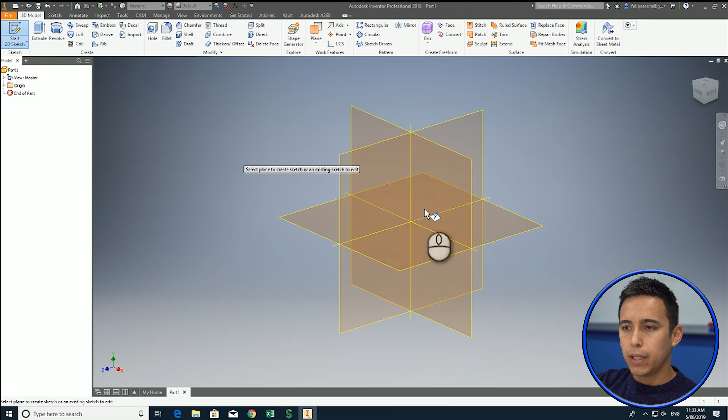So basically what I'm going to do right now is create a new part using the templates, the part templates that are already included in Autodesk Inventor out of the box. And the first thing that I'm going to do is to create a new sketch in one of the planes.

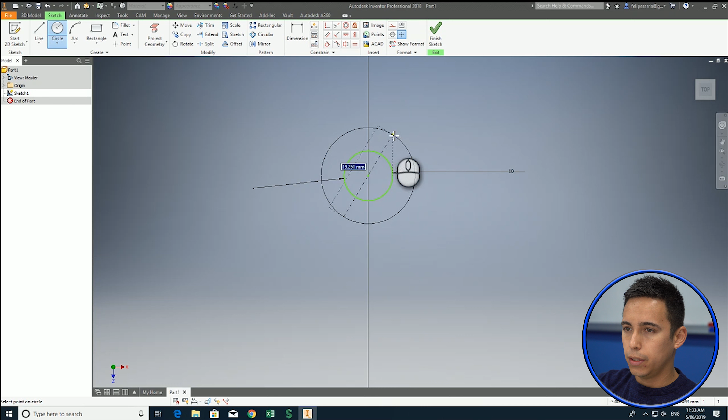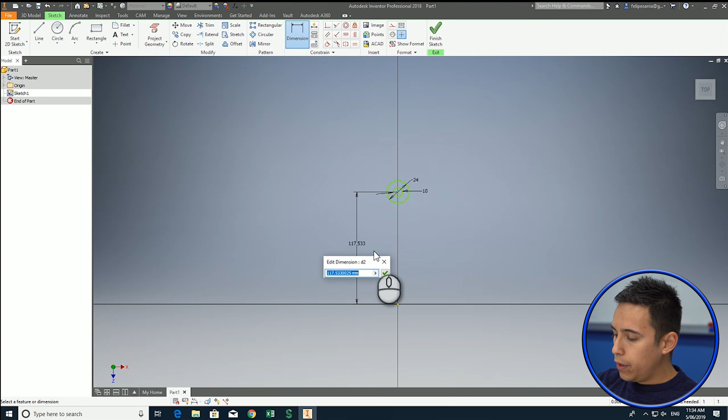And now I want to create some circles using some dimensions. In this case, this is going to be a 10 millimeter circle, and then I'm going to create another circle that is going to be a 24 millimeter diameter circle. Now this is my first geometry, which I'm going to constrain using this dimension command or this dimension tool, and I'm going to constrain these circles 35 millimeters from the center point of my work plane.

Now I'm going to create another two concentric circles. One is going to be a 12 millimeter circle, and the other one is going to be a 32. There you go, 32. What I'm sketching is called a girder plate that is going to be used later on an assembly. So I'm going to constrain these concentric circles as well using the center point of this plane.

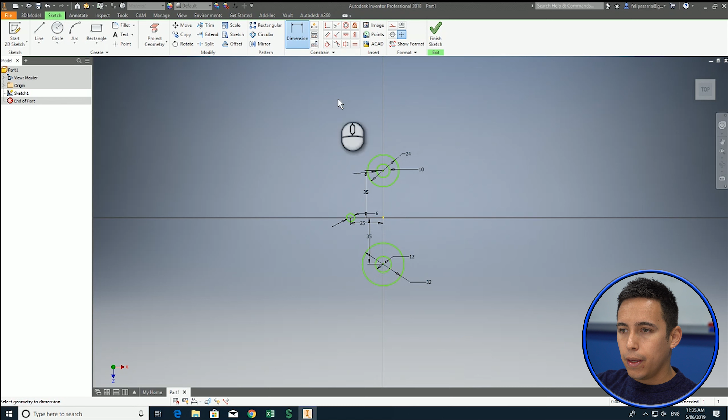And now I'm going to create two circles that are going to be used to insert some pins, and these circles are 6 millimeter diameter. And I'm going to constrain them 25 millimeters away from the center point of this plane. And I can create another one at the other side, 25. Oh, sorry, this is 6, perfect. And I'm going to constrain them using this constraining tool, 25 millimeters away from the center point.

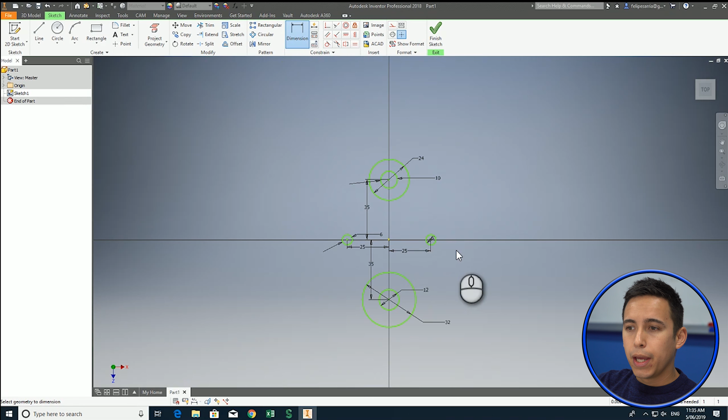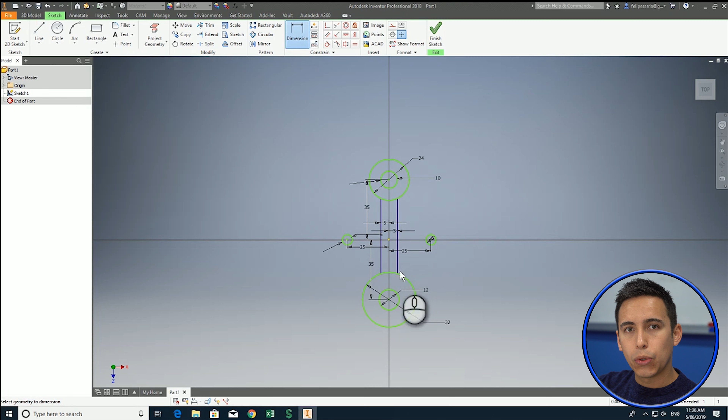Now that I have all these constrained, I'm going to add some lines here. This is going to be like a rib between these two circles. You're going to see how it works when I extrude it. And I'm going to constrain these two lines 5 millimeters away from the center, like this. All right. It's all about constraining and using all the tools that you have available to build or to draw your sketch in a proper way.

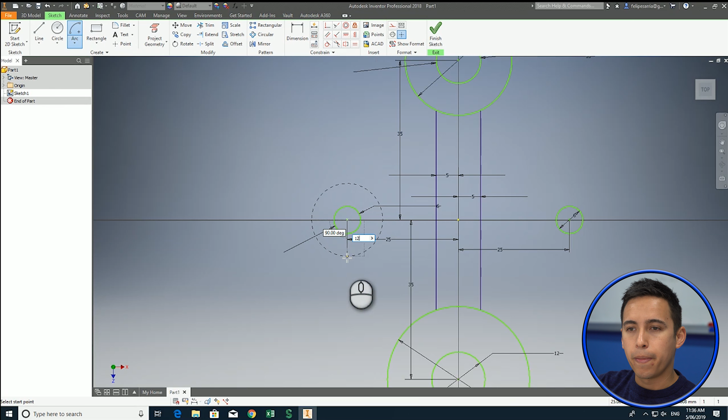And now I need to draw some arcs. So I'm going to use the center point of these two circles as my initial point, and I know that the radius of these arcs is 12 millimeters. So there you go. I have one arc here, and I will draw the other arc in the other circle. Nice.

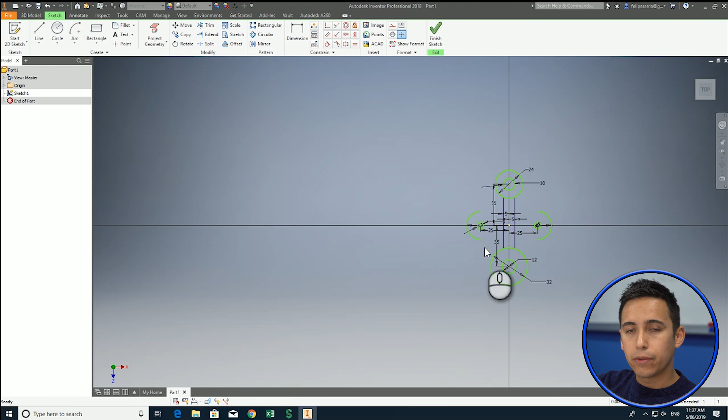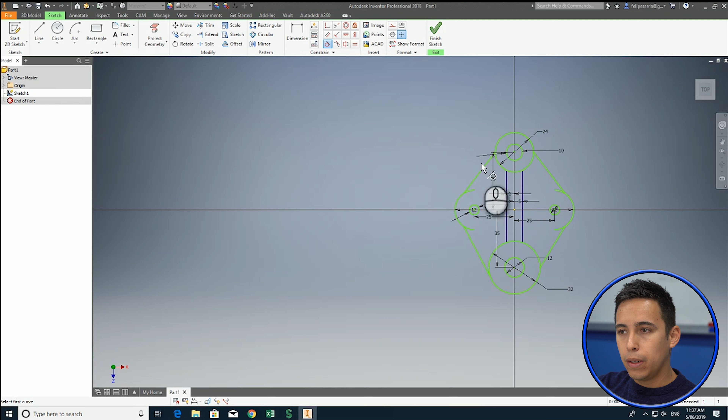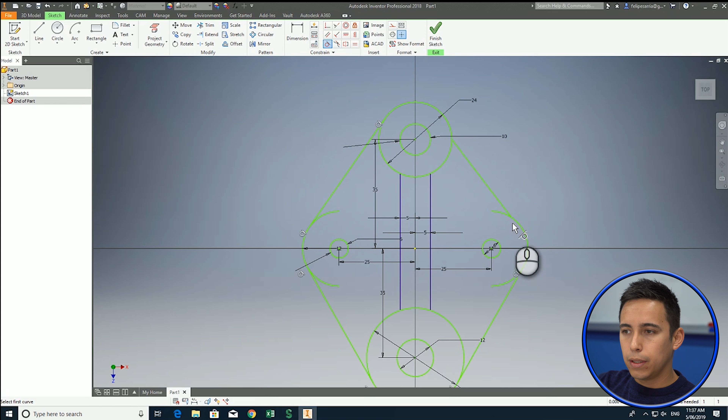So now we have all the references that I need to draw some lines, and I'm just going to draw those lines like this. I don't care about the dimension or the placement of those lines right now, because now I'm going to use a tangent constraint. And that tangent constraint is going to constrain precisely that line to the circles and to the arcs. So as you can see here, I'm constraining those lines using my tangent constraint, and now it's looking the way it's supposed to be.

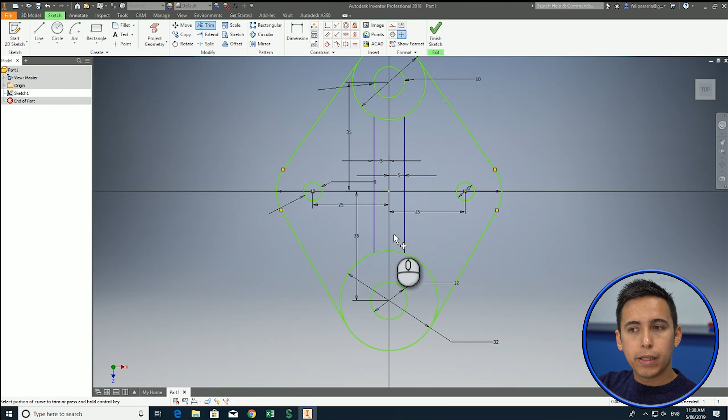Now the last thing that I need to do is to trim some lines that I don't need. For example, these lines, I don't need them anymore because I need a solid profile. Now that I have my solid profile done, I'm going to finish my sketch, and I'm going to start extruding this sketch to create my solid part. In this case, this girder plate.

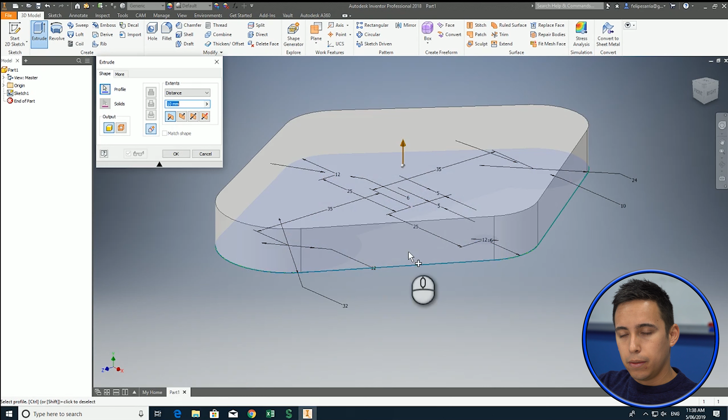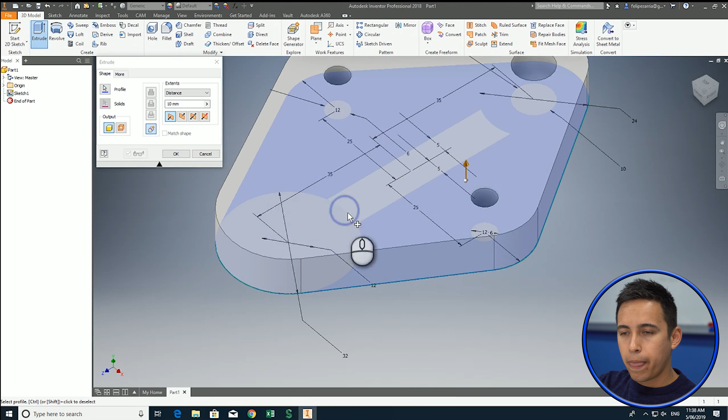So using the extrude tool, I'm going to select the profiles. So this profile, well, it took all the profile all together. So I'm going to select only the profiles that I do need. For example, this profile, this profile, this profile, this profile. Just like this.

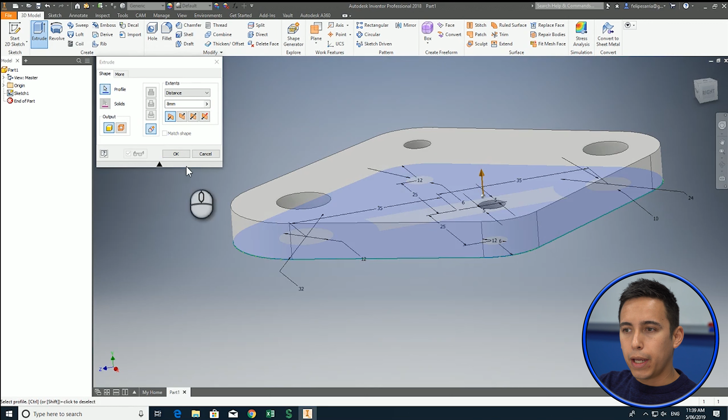But I'm going to extrude this profile only 8 millimeters. I don't want to extrude this circle. Okay, so just leave it like this. Okay, and this profile. All right, nice. Okay, now I have extruded the base plate, the base part of my girder plate.

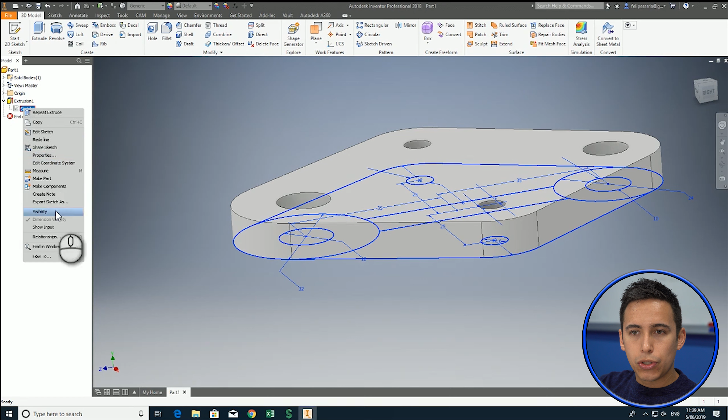And what I can do is share this sketch to actually use it to extrude the next profiles or the next solid geometries of this body. So I'm going to share this sketch, and then I can extrude this middle part, for example. There you go. And I'm going to extrude this rib 30 millimeters, okay, in this direction.

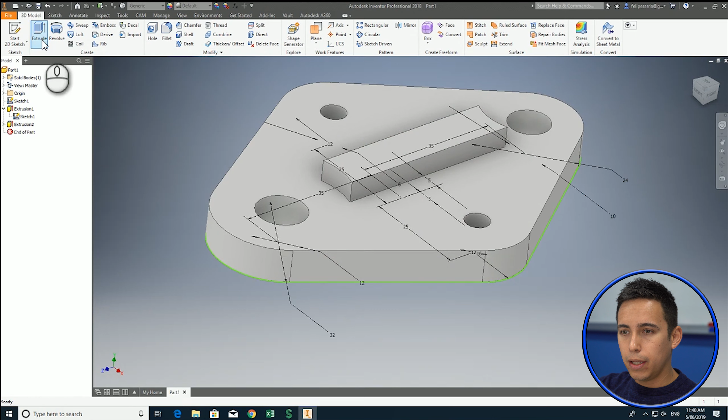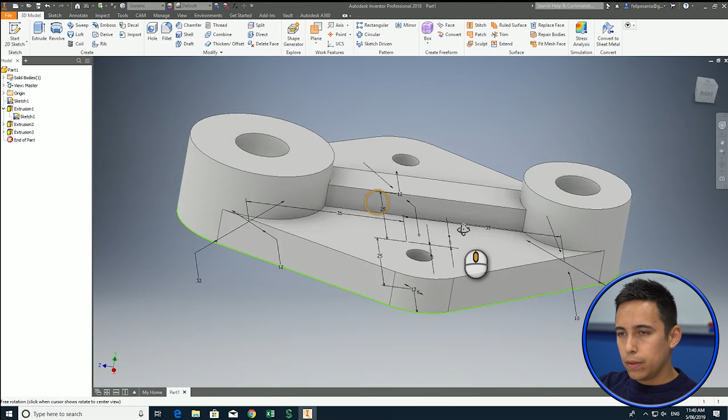And now the only thing that I'm missing is these geometries. These circles are quite hard to pick, but I'm going to. There you go. And it's going to be 80 millimeters, the height of those features. So as you can see, this is my final part. I can turn off the visibility of that sketch, and this is my final part, this girder plate that is going to be used later on an assembly.

So as you can see, these are basic sketching and modeling techniques using Autodesk Inventor, which we are going to learn in one of our CAD classes for mechanical design. So I hope you find this video interesting, and I hope that it will give you a quick overview of what we do in our classes in Australian Institute of Advanced Studies.